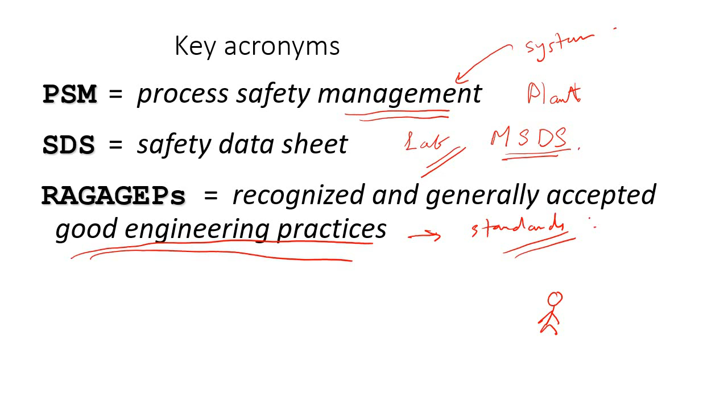So it could be at the level of a person, talking about that person who's sitting in an industry with columns and heat exchangers and so on. What about this guy? Is it safe for him to operate here? Well, it's good for him to have a helmet, good to have an overcoat, so if there is some kind of fire, there's also something to protect him from gases. Is the gas concentration in this area good enough, or does he need to wear a mask on his face? This looks like a beard more than a mask for me.

Okay, and he also needs to wear gloves. What about safety shoes? Maybe he needs to wear some kind of safety shoes. Why? Because safety shoes with steel toes, I didn't see that before. So maybe he needs to wear some safety shoes, because he's going to be working really hard, and maybe he hits one of the pipes that is everywhere, here and there, and he's going to break his finger, right?

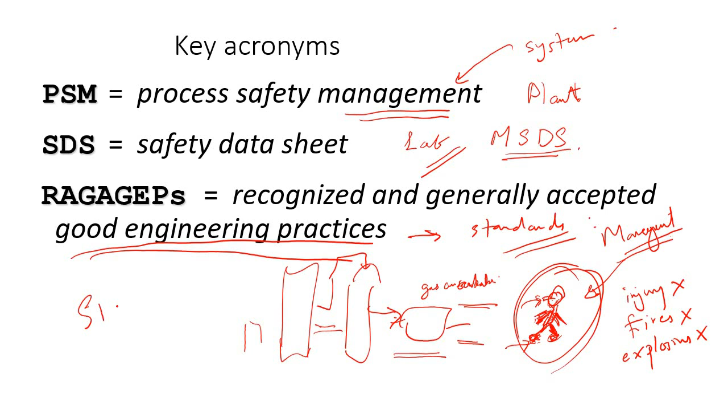So talking about the safety guy, that person working within the industry, there are many things we should take care of regarding his safety, what he's going to get inside his nose, breathing, inhaling, and what could hit him. We don't want any injury, no please. We don't want any fires, yes, no fires. Let me correct that - we don't want any fires, we don't want any explosions, and so on. So the things we need to be careful about are making things safe for that person. And talking about all of this from a management point of view, we are talking about process safety management, and talking about good practices and so on. Of course, we are also talking about standards for good practices, and we are going to cover that.

Okay, so just to trigger our mind, we already triggered our mind with some safety concepts or terminologies. Looking at the chapters, there are more chapters actually within that book. There's also Chapter 12 and 13. I didn't mention them because we are not going to take them, sorry for that. But there are also two other chapters that we are not going to be covering.

Relief sizing, and we are not going to be covering toxic release and dispersion models, because of the limitation of time. So what we're going to take today, we're going to take an introduction for safety and what it means and where it happens, and if there are some incidents that happened before that we want to consider, and then we're going to talk about toxic materials and what is toxic.

Could it be toxic to your skin? Could it be toxic to your eyes? It could be toxic by inhaling, digesting, or ingestion and all that.

What about industrial hygiene? How can you maintain that you're having everything built in so that there's no problem with safety? So if you're talking about the design itself, or you're talking about laws and standards that maintain everything in industries to have hygiene from any losses.

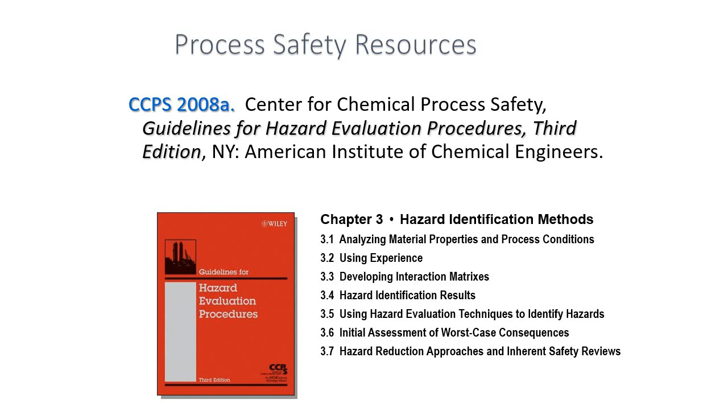So there are references that if you want to read more about hazards identification methods, you can go to this book by Wiley. And there's also another reference talking about the incidents that define process safety by John Atherton and Frederic Gil. So these are the other two references. But our main textbook is by Crowl and Louvar, I think it's the best textbook I have ever seen in chemical process safety.

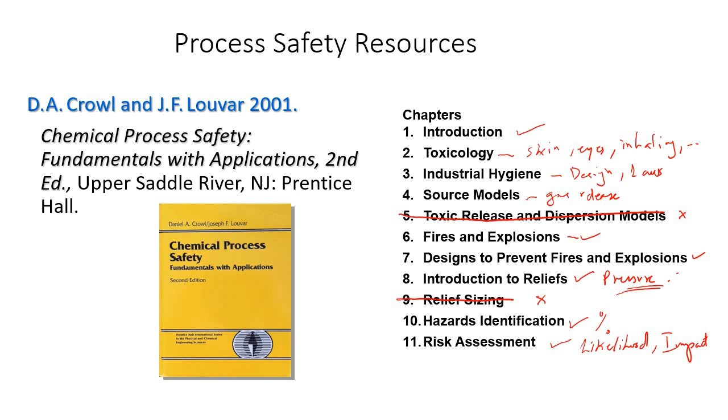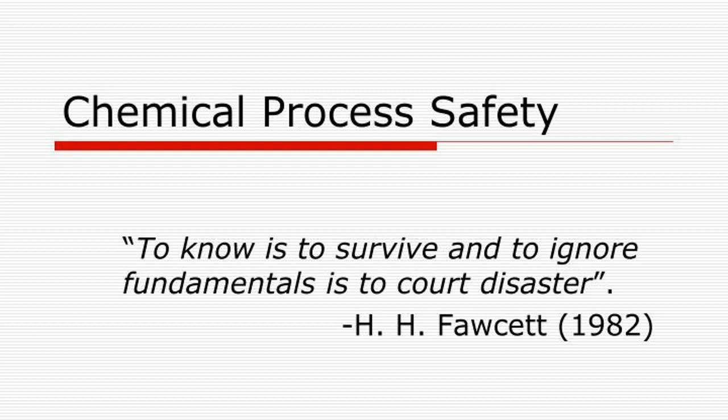Okay, so chemical process safety, one of the popular scholars, Fawcett, said that to know it is to survive, to ignore fundamentals is to court disaster. What he wants to say here is that we should consider fundamentals to maintain that we don't have disasters.

So definitions, just to get some definitions. So when we talk about safety, we just want to say that we do not want to have any loss, or we want to prevent loss. Okay, loss could be in certain aspects. It could be in the property, that means something happened within the building, or something happened within that instrument.

It could be the property, or it could be the people. The people got hurt, which is injury, or you're talking about the people who, hopefully not, died, which is fatality, and it could be the environment. So we don't want anything to happen within these three items. So that is safety. We want to eliminate that from happening, okay, we want to eliminate it.

The hazard is anything that causes this kind of loss, a chemical or physical condition that has the potential to cause damage. So the word damage here, anything that causes damage and loss is a hazard.

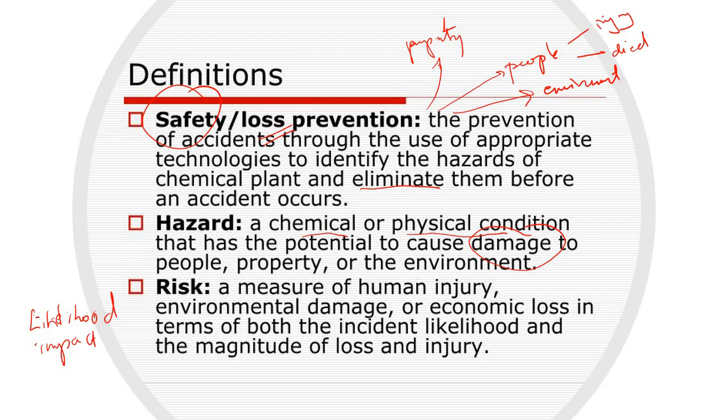And risk, that means, okay, now this hazard which is going to cause the loss, is it high risk or low risk? Well, it is high risk if it happens every time, okay, which is again the likelihood. And it depends on the impact, if it is a high impact or a low impact, which is the magnitude of loss and injury. So if you multiply these with each other, if it is likelihood to happen, that means it happens very frequently, like 12 times per year, and when it happens it has a high impact, that is a very, very high risk.

Okay, so a great guy said, well, why don't we write new terms, beautiful terms for safety? It just reminds us of the details of what we are going to be talking about, or what are the concepts or items of safety. So S for system, A for attitude, F for fundamentals, E for experience, T for time, Y for you.

What they want to mention here is that you cannot have a safety program without a system. You cannot have a system, that means a management for the safety program, for entry, for the way how you put on clothing, for the instruments you're going to use, for the electrical supplies, and what kind of wires.

And where the car should drive, and so on - all management of the safety part. The second thing is the attitude. That means everyone is responsible. Everyone.

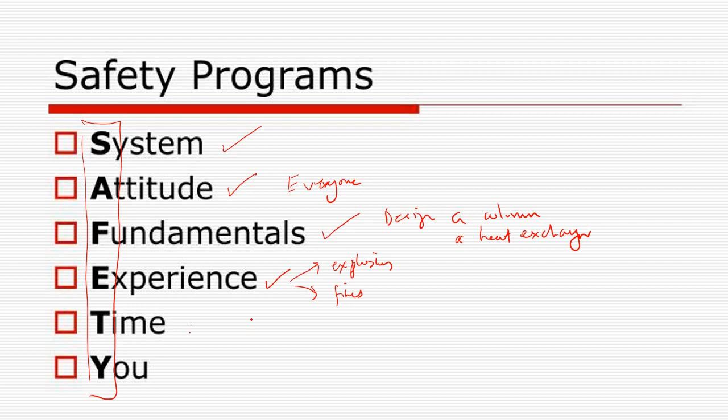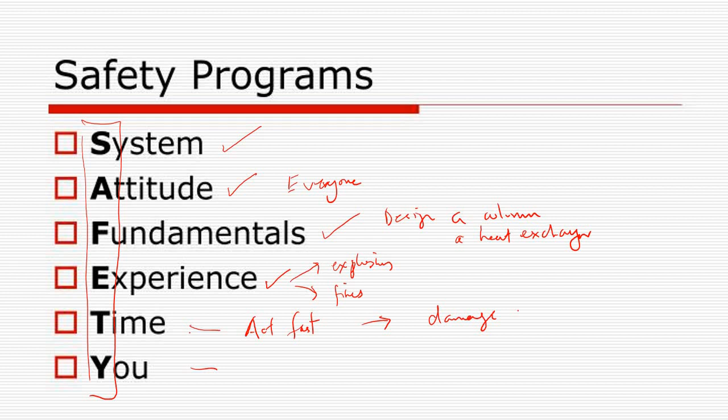And talking about time, we need to act fast, because if we act very slowly, easily we could have some kind of damage to a property or to a person. And of course, us and you and me, we are responsible to maintain that safety. So all of us together, we maintain that safety.

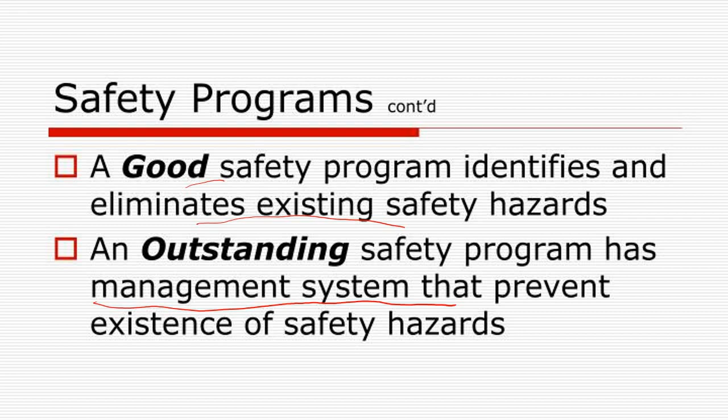So if I would say what is a good safety and what is an outstanding safety program - a good safety program will eliminate any hazard. But an outstanding safety program is to have a management system, to manage this safety program, to manage that safety. So the outstanding safety is definitely better than a good safety.

Other things in our introduction is that we should also consider ethics. And considering ethics, there are a lot of things we could talk about. AIChE, which is the American Institute of Chemical Engineers, has set some kind of fundamental principles. We cannot go through all of them, and we don't actually need to.

But just to mention quick stuff here, for example, being honest - being honest is really important because you need to be honest and impartial. We had examples of some people who had a problem of not following procedures, and they caused some kind of fires and explosions, and then they say, I don't know what happened. They just say, oh, I don't know what happened. And they caused more injuries, and more damage to themselves and to the others. So no, you shouldn't be like that.

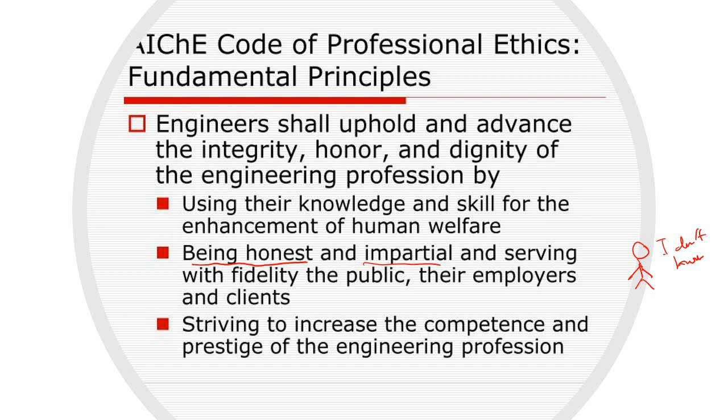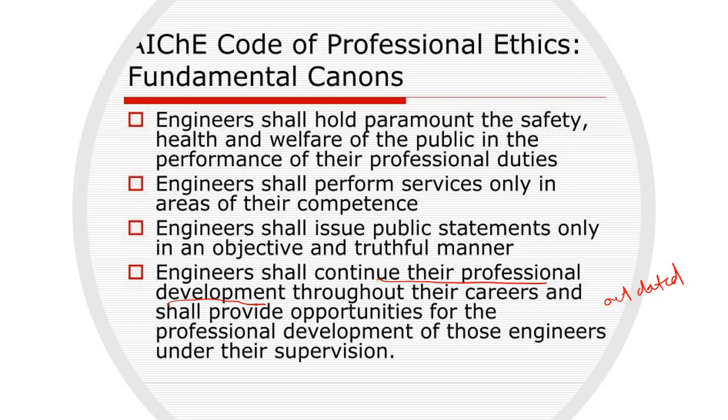You should be honest. And of course, you should increase your competence because things are always changing with time. Another example is that you need to continue your professional development, because you will be outdated with professional standards or safety standards if you don't do that. So these are the many things that come to mind when we talk about code of ethics.

What accidents do happen in chemical plants? Well, accidents do happen in chemical plants, we know that. But you can see that they fall somehow between three main types of accidents: fires, explosions, and vapor cloud explosions. These are the types of chemical plant accidents that are very popular.

And if you look at the details, fires is a type of accident, and here we want to talk about probability of occurrence. How high is that probability? It is high probability. An explosion is less, and toxic release is even less than them. So fires could happen more frequently than others.

How about fatality? Well, fire does not have that kind of fatality, but oh my god, explosions definitely have fatality, but it will be limited to the surroundings to some extent. But the one that has no limits to the surroundings, and even goes further and further, is the toxic release. So we can see that the occurrence is very minimal, but it has a very high fatality.

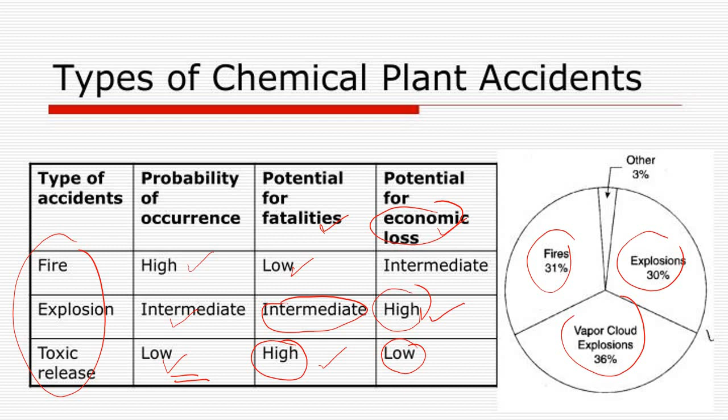I know for a moment you think that we should memorize that. Don't worry about memorization, because all our exams are going to be open book, so you're going to have everything within hand. So don't worry about memorizing, rather you need to understand what is going on.

Okay, so let's go to some statistics. Talking about statistics, what is the main reason for having any kind of accident, error, or problem within your system, or things that are not operating well? Mechanical is the most common reason that causes accidents here.

This is by percentage, by the way - this is 44%. And operator error is 22%. So that means if I work on the design of the mechanical part, and if I work on the training for the operators, I could manage to have no problems at all within my system.

Of course there are other reasons - process upsets, natural hazards, design, and so on. But what I'm trying to say is that these two things I mentioned are the main causes of high statistical errors.

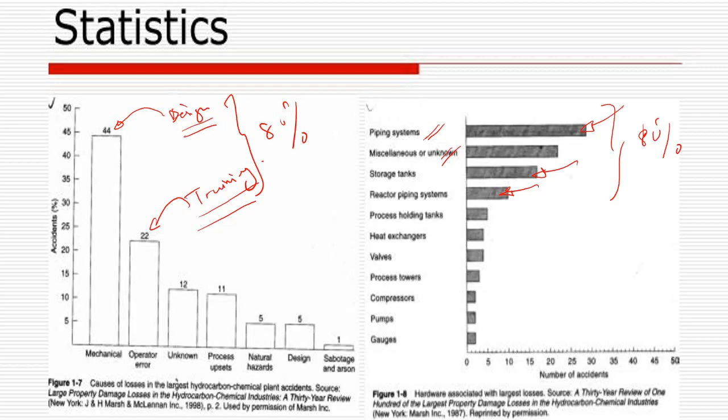Okay, what is an acceptable risk? Well, it's difficult to say because we cannot eliminate risk entirely. It just should happen, and this is life, it's a part of life. We have cars on the way - we should have an accident. It's not that we should have, it just happens that it has to happen.

So what we need to talk about here is how to deal with it and how to minimize it. Okay, so we need to know if the risk is high or not, and of course the layout of the plant and where we have exposures. We could also control how things are going.

Acceptable risk should be calculated, and not based on public perceptions, because public perceptions are always confusing. We should concentrate mainly on what we calculate as a risk. However, we should make the public aware of all the possibilities, because they are part of what we are doing, or part of the whole system, so they should be aware about it. But the thing is, it's not what they say that identifies how risky or less risky it is.

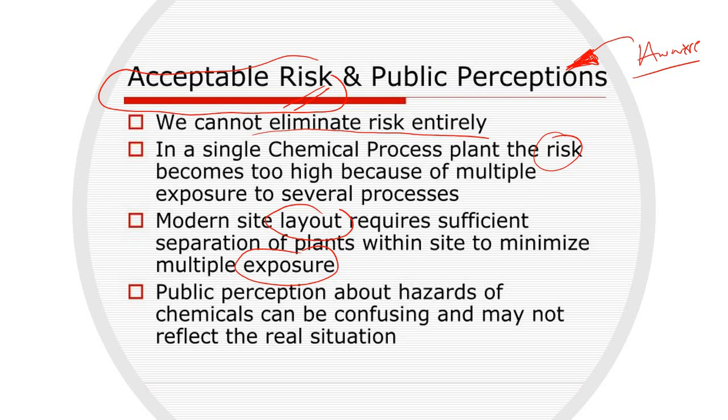Okay, so now just some calculations which help us get the idea of the risk. There are three methods to report accidents: the OSHA incident rate, the fatal accident rate, and the fatality rate, or the deaths per person per year.

So the higher the fatality rate, that means more people are dying per year. The fatal accident rate means it's more possible that accidents will happen that could cause someone to die or get injured. Fatality is a little different than fatal, even though sometimes they're related to death or to injuries. And the OSHA incident rate is how many incidents occur.

And of course, I did not mention OSHA, which is the Occupational Safety and Health Administration. So that is an occupational safety, health association. It's also related to safety and health, and it's a very popular association.

Okay, so all three methods report the number of accidents or fatalities. Accidents is the incident rate, or fatalities, for a fixed number of workers. So they need to fix that number. Why do they fix the number of workers?

So that they can compare from one country to another. If I say I have 100 incidents per year, and someone else says 1,000, it could be that the person who said 1,000 is in China talking about a very big company. I'm not sure, and I just have a small company, which is why I have less numbers. But when I base it on a certain number of workers, per 10,000 workers, and say how many of the 10,000 workers per year have an incident, then we can compare. This is why we try to fix the number of workers.

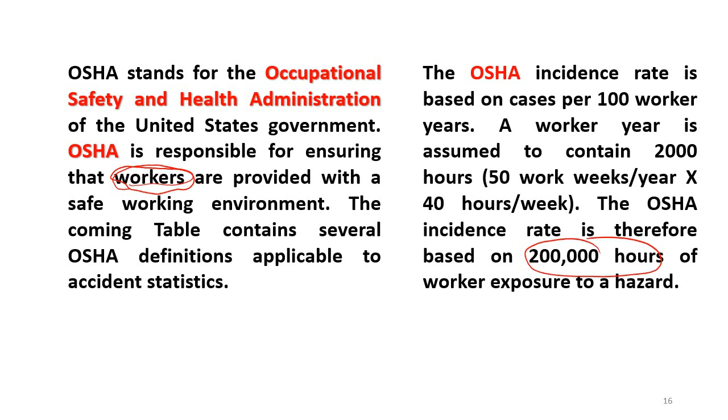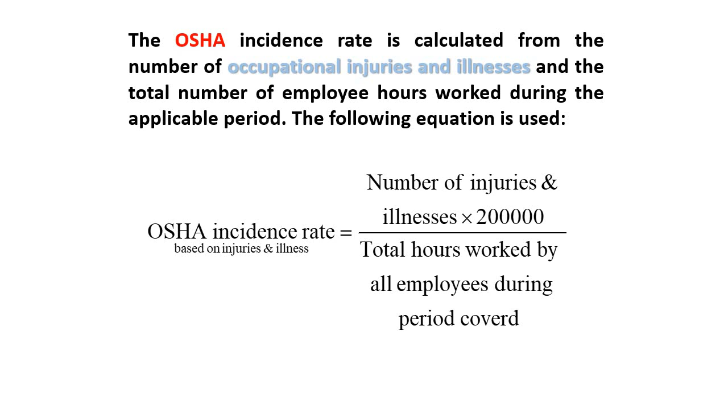This is why we say 200,000 hours of worker exposure to hazard. So I multiply 200,000 worker hours of exposure to hazard by the number of injuries that I have, divided by the total hours worked by all employees in that period covered, and that will give me the incident rate that I want. We'll take an example very soon.

Before the example, there are some glossary terms to go through. First aid: we know you need first aid if you have an injury. Incident rate: number of injuries, as we mentioned. Lost work days: that means you're losing some work days because someone is hurt.

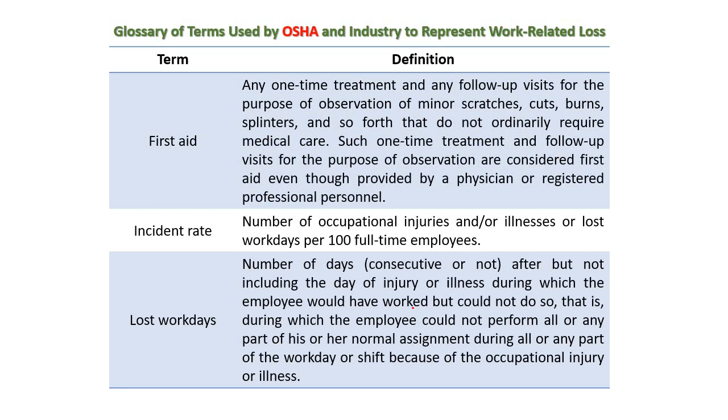There is a detail here, because there's a difference between lost work days and some other terms. Lost work days are counted because someone is injured and just left — the number of days after, but not including, the day of injury, during which the employee would have worked but could not.

Medical treatment: you're dealing with treatment through a doctor, physician, or registered professional personnel. Occupational injury: an injury such as a sprain, cut, or burn that results from work — it happened there at that work, an instantaneous exposure that happens in the work environment.

Occupational illness: that means there's an illness, like someone getting a dizzy head because of something he smelled, resulting from occupational exposure. It happened through his occupation and exposure to environmental factors — for example, a certain percentage of a gas within the atmosphere that caused illness or disease.

Inhalation: he has a problem with breathing, and a problem with how his stomach is reacting to what he had breathed in.

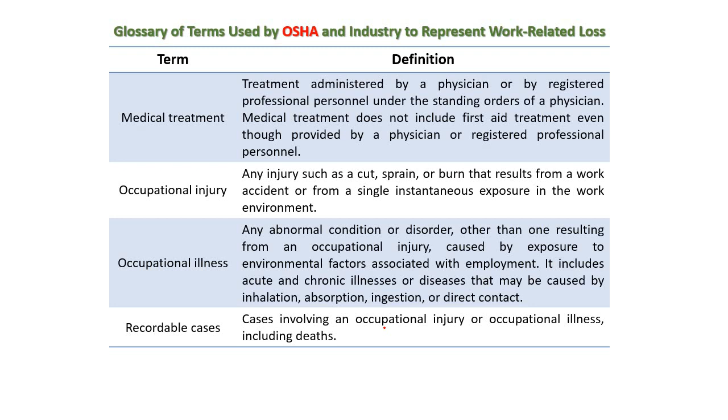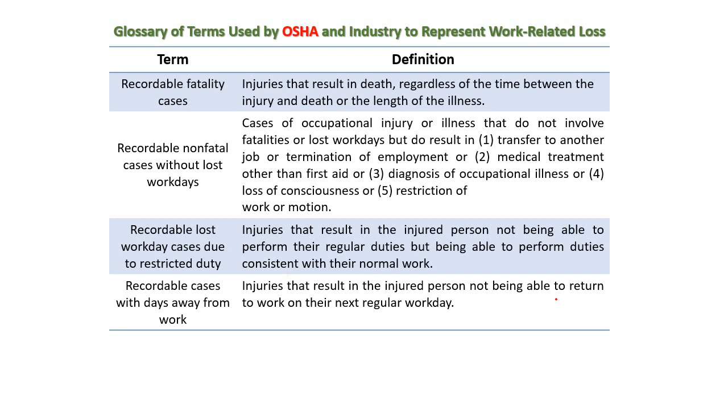Recorded cases are cases that are recorded — how many injuries, how many deaths, and so on. Fatality cases: how many people are dying. Non-fatality cases: people who don't die but there are lost work days, or recordable lost work days due to restricted duty because of the injury. And there are cases with days away from work, meaning not being able to return to work on the next regular work day. These are all just terms, along with medical cases.

So going back to recall, after covering the details of the definitions: an incident rate is based on lost work days instead of injuries and illness, for this case. So it's the number of lost work days times 200,000 work hours, divided by the total hours worked by all employees.

I think so, you can just read that, it's all about the definition. Okay, what about the FAR?

The FAR, F-A-R, the fatality rate. Talking about the fatality rate, it is used by the British chemical industry, and this fatality rate is a report of the number of fatalities based on 1,000 employees working their entire lifetime.

And what is the entire lifetime? That means they're assuming to work a total of 50 years. Thus, the FAR is based on 10 to the power 8 working hours. The resulting equation is that.

The resulting equation is the number of fatalities multiplied by 10 to the power 8. That means we are considering that they are working for 50 years, 1,000 employees, and that is the number we multiply with, divided by the total hours worked by all employees during the period covered.

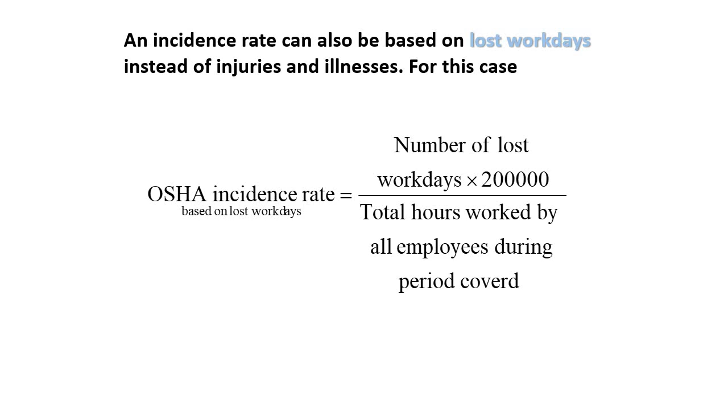So FAR depends on the exposed hours, and even the OSHA incident rate. If you go back, the OSHA incident rate has the 200,000 hours, and the FAR is multiplied by 10 to the power 8, considering the working hours that we have, and we have that 1,000 employees. And then the fatality rate does not depend on the exposure.

Well, the number of exposed hours is poorly defined, if you can see. It just calculates how many fatalities we have per year over the total number of people. And here we just mentioned that the ones who consider the number of exposed hours are the OSHA incident rate and the FAR.

So going to the example: a process has a reported FAR of 2. If an employee works a standard 8-hour shift, 300 days per year, so 8 hours multiplied by 300 days per year, compute the deaths per person per year.

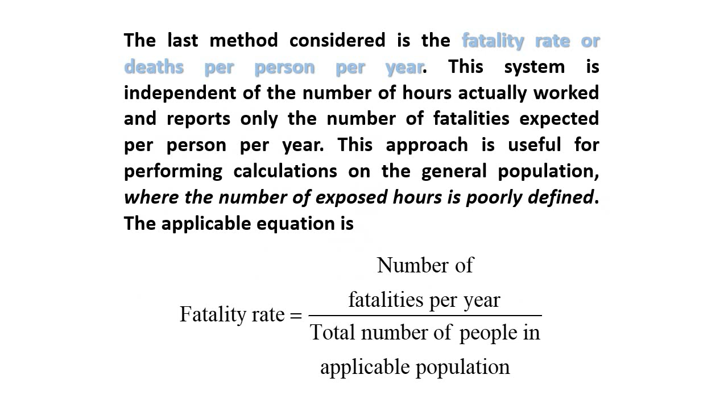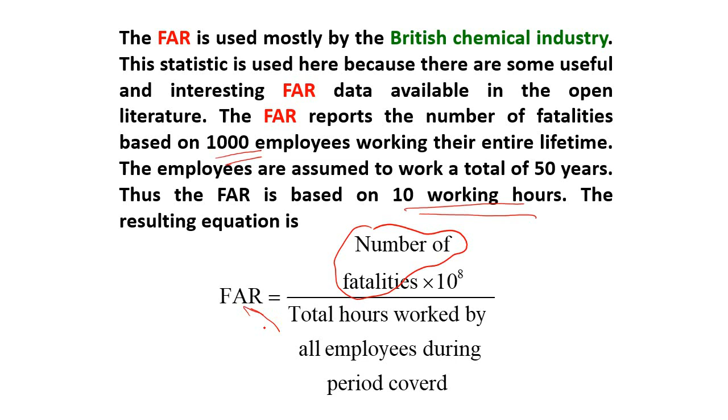Okay, sorry. So we know what you're going to do. Talking about the equation, so we have the equation: if you just look at it, FAR is equal to number of fatalities into 10 to the power 8 over total hours. So if you want to calculate the number of fatalities, we need to multiply FAR with the total hours worked.

So what is the FAR? The FAR is 2. Multiply by the total hours worked. Total hours worked is 8 hours per day into 300 days per year, and this is divided by 10 to the power 8. So we got 4.8 times 10 to the power minus 5.

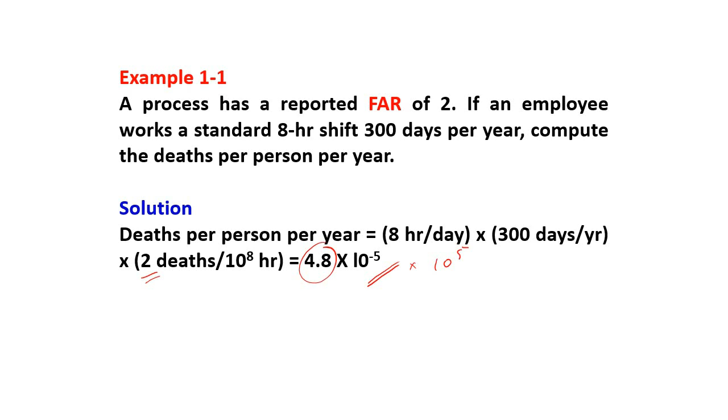I know you say the number of fatalities is very low, it means no one is dying. But if you multiply by 10 to the power 5 hours, for example, you're going to know that based on 10 to the power 5 hours, which is 100,000 hours, there's not just one person but about 5 persons going to die every 10 to the power 5 hours. And you can compare now from one place to another if this is acceptable or not.

I was just going to say that it's not acceptable for any person to die, but it only happens, it's like accidents. In car accidents, people die. From accidents, we just need to live with that kind of technology of what we are doing, and sometimes it causes some side effects that are out of our control.

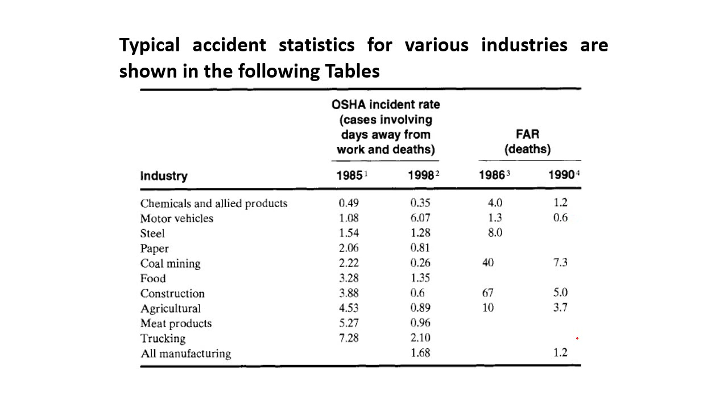What about agriculture or construction? In construction, people died just from falling off several stories, and the reason is that there wasn't a lot of management there for safety. Look at the number now, it's just 5. Agriculture went from 10 to 3.7. So you can see that standards and management of standards can make things different.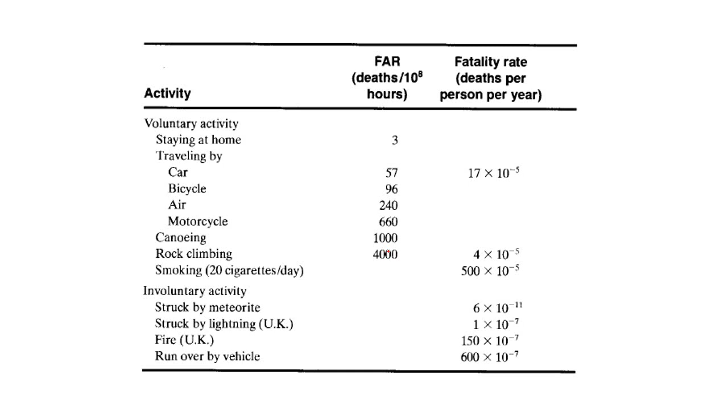Talking about bicycles, they're higher than cars, even though we know no one is going to die from a bicycle alone, but hitting a car could make him die. You can see even airplanes - we know there's no data here, but it could actually be safer sometimes to go by air rather than car. Rock climbing is high too - if you fix number of hours and number of people, it's very high to have this incident, the fatality rate, and so on.

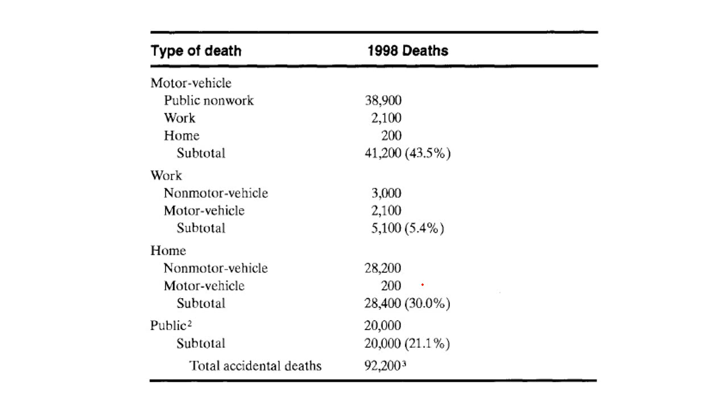And again, the number of deaths that happen for motor vehicles, number of deaths that happen for work, for non-motor vehicles, motor vehicle deaths from homes, and so on. So this just gives you the details of what the number of deaths are.

So, acceptable risk. Talking about transportation incidents on a highway, of course we're going to have many incidents. Let me read that: the manner in which workplace fatalities occurred in 1998. So what happened in workplace fatalities? Based on the total number of fatalities, which is 6,000, this is what happened that year.

We had fires and explosions - these are the number of people who died. These are the number of people who died due to harmful substances. These are the number of people who died due to falling. These are the number of people who died due to contact with equipment. These are the number of people who died based on violent acts, and these are the number who died because of cars and vehicles. I can't see how big that is, but you can see highway struck-by-vehicle, non-highway aircraft, or within-highway incidents are the highest - you can see the big number there.

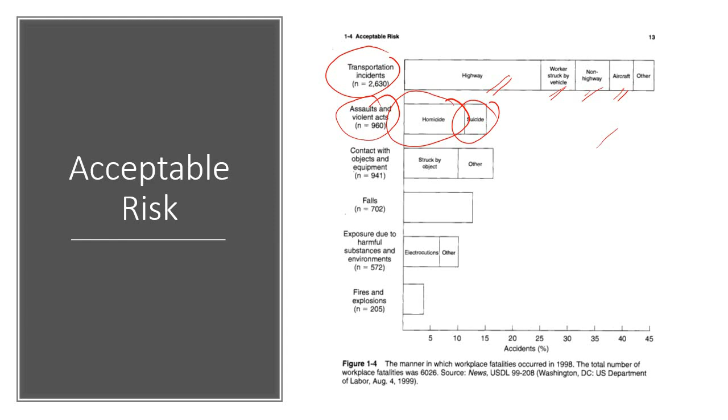It's just said, acceptable risk - is this acceptable? It is acceptable that it's happening, but we can also do something about it. For example, homicide and suicide rates are very low in some countries, very high in others. So definitely there is something we can work on to fix it.

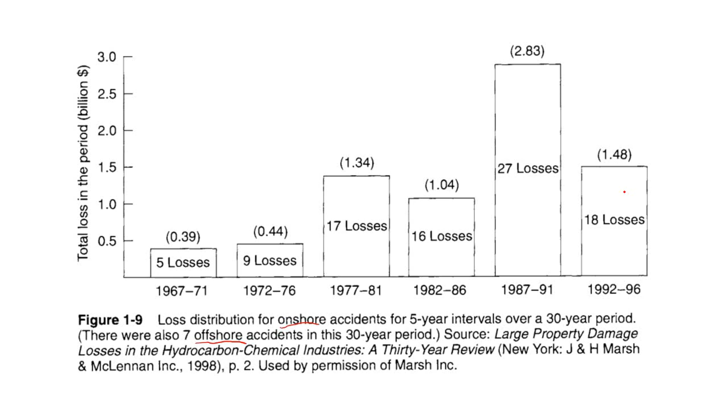So talking about loss distribution - the loss distribution for onshore accidents over 5-year intervals, over a 30-year period. There were also 7 offshore accidents in this 30-year period, so we're talking about onshore and offshore accidents in your country and other countries. From 1967 to '71 we had 5 losses, then in the next period 9 losses, then 17, then 16, 27, and the last one 18 losses.

So we are trying to control things and keep losses lower, even though our technology is going up and the number of industries is really growing - but that is why you had high losses.

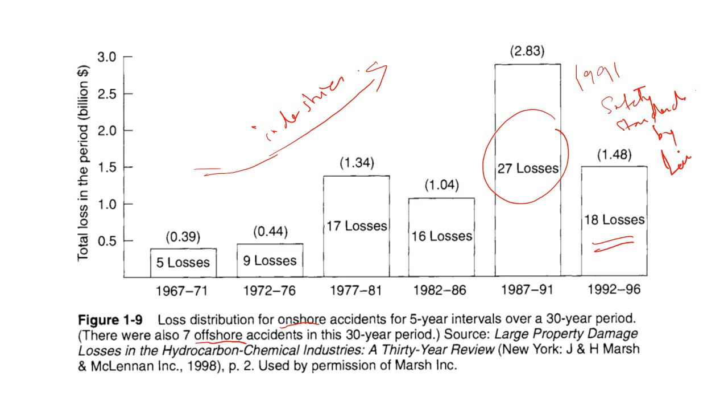In 1991 and 1990, we had a lot of safety standards coming on, and everyone started obeying them by law, and this is why things have changed within this year.

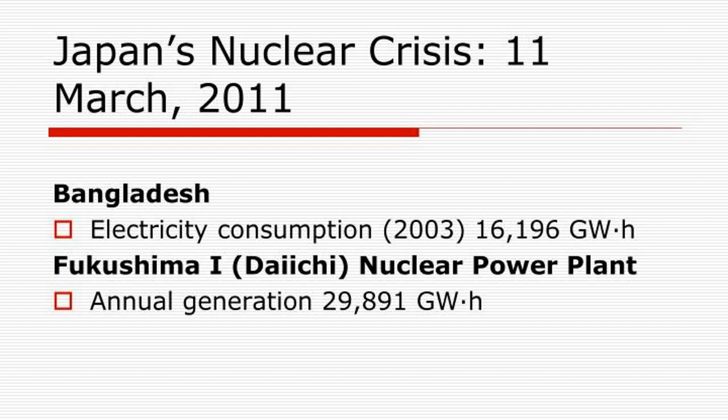Now talking about the crisis. There are many crises that happen in our life. Japan nuclear crisis is one of them, and if you go through it, there are many things that happened. Bangladesh, for example, had a big problem with electrical consumption.

What was the reason? There was an earthquake in Japan, and due to that earthquake, the nuclear plant could not manage. We could not manage to control it because of the cooling system we were trying to have for the control rods. Because of that earthquake, things were out of control, and the pressure got higher and higher, and then it exploded.

Actually, it was also not at the required depth, and because it was not the required depth, we learned from experience. It was very close to the ground, to the surface, and that also caused more severe problems.

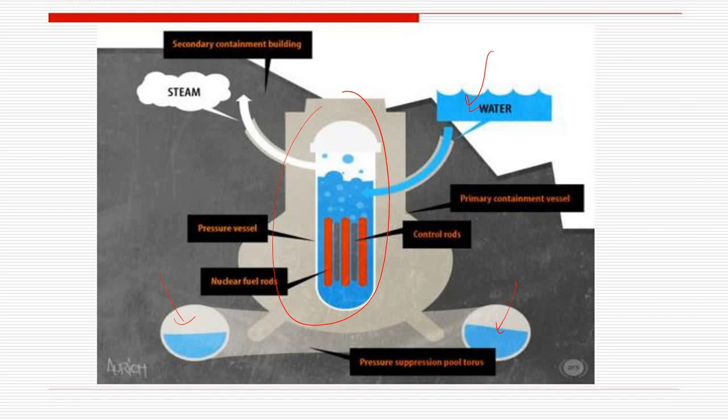The earthquake happened, as we mentioned, and the emergency generators that worked to run the cooling system did work, but then shut down after an hour. When the cooling failed, the water started boiling, the steam pressure went up, and things were out of control.

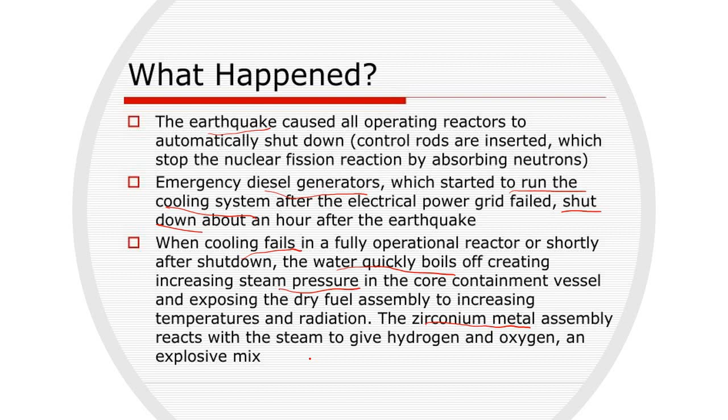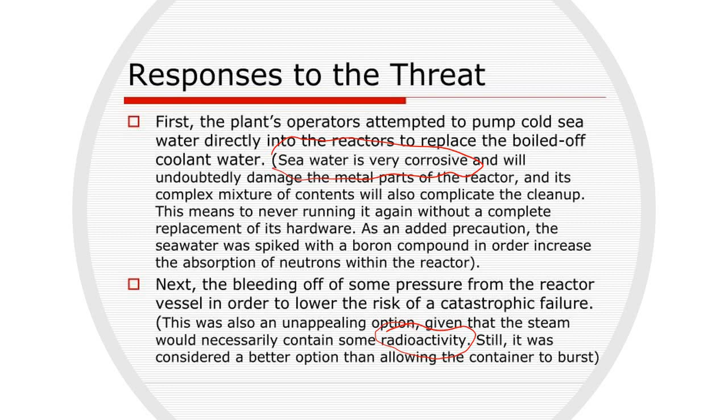Then we had zirconium metal with the steam. That was an explosive mix, and that was a big problem. There was a big threat all over. Many people died, and a lot of things happened. But one of the worst things that could happen was the radioactivity. Seawater is very corrosive, so it also made the plant go out of function.

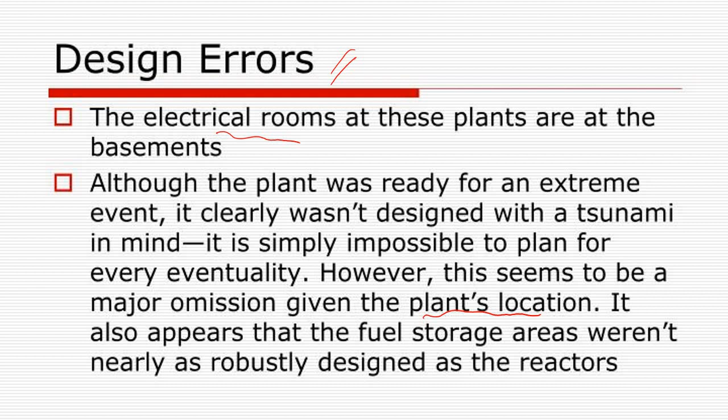Talking about the errors here, we had some design errors. The electrical rooms were sitting at the basement, so there was no access to them, so we couldn't even control things. They were out of our hands. That was like a design problem. There are also things about the plant location and how deep the plant was going to be.

Human nature means we don't have everything really back in hand, so less immediate backup systems tend to be not well designed or maintained compared to the primary backups. One example is the temporary holding ponds. The temporary storage pool to which the fuel had been transferred during maintenance is much smaller and near the top of the reactor, unlike the 15-meter deep permanent storage pools. That was one of the big reasons.

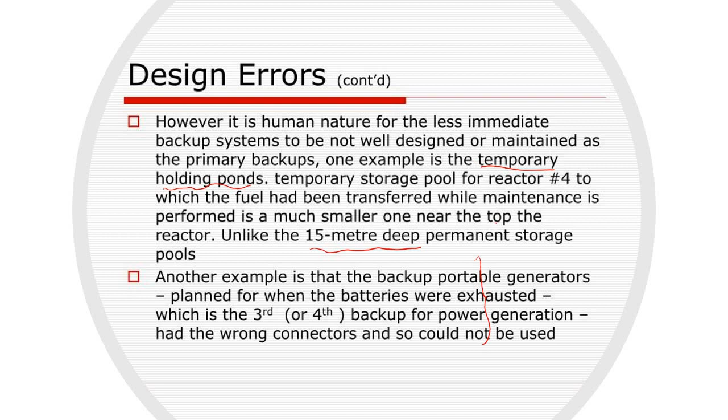The generators did not work for some time, so the batteries were weak and exhausted, and we did not have a backup for that.

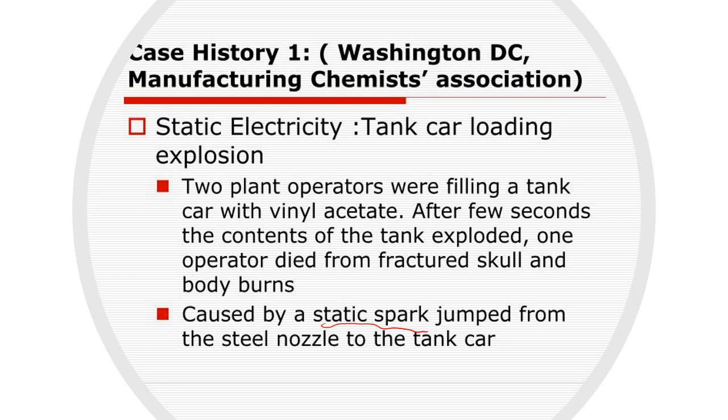Another example: two plant operators, from a case history of the Manufacturing Chemists Association in Washington, D.C., were filling a tank with vinyl acetate, and after a few seconds, the contents of the tank exploded. One operator died from a fractured skull and body burns caused by a static spark that jumped from the steel nozzle to the tank car. This should not happen again; we should have proper design and procedures to prevent it.

Chemical reactivity: a chemist twisted the cap of a bottle of isopropyl ether, the cap broke, and it exploded. The man died, caused by rapid decomposition, due to internal bleeding causing hemorrhage. So we should be careful.

Another case from the chemist association, more related to chemistry than design. We already talked about the design part, now we're talking about the chemistry part.

System design: an ethylene oxide explosion. A process storage tank containing 6,500 gallons of ethylene oxide was accidentally contaminated with ammonia. The tank ruptured and dispersed ethylene oxide into the air. This vapor cloud exploded. One person was killed and 9 injured, with property losses of 16.5 million.

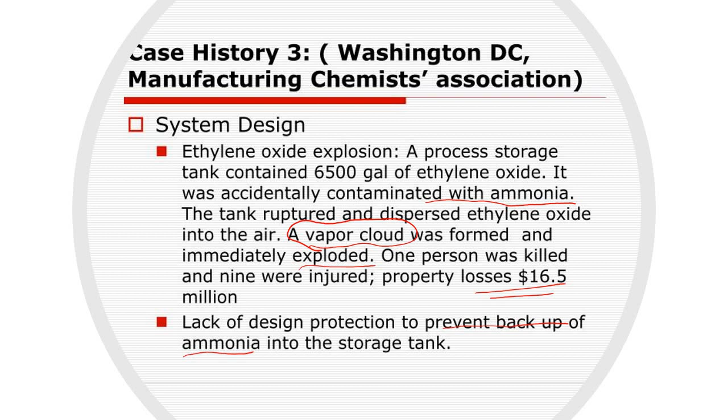There was a lack of design protection to prevent backup of ammonia. There should be a backup system so the ammonia doesn't contaminate the ethylene oxide and cause that vapor cloud explosion.

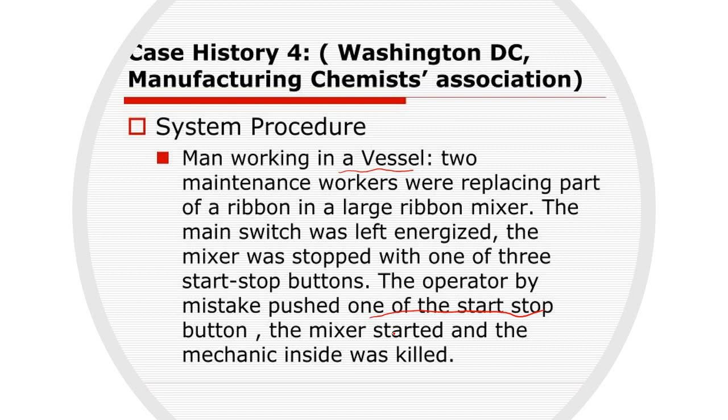A man working in a vessel - this is very painful. Two maintenance workers were working together, and the main switch was left energized while the mixer was stopped. The operator by mistake pushed one of the start-stop buttons, and the other mechanic was killed.

Bigger disasters, like the one that happened in Bhopal, India, you can look up on YouTube - there are a lot of details about what happened.

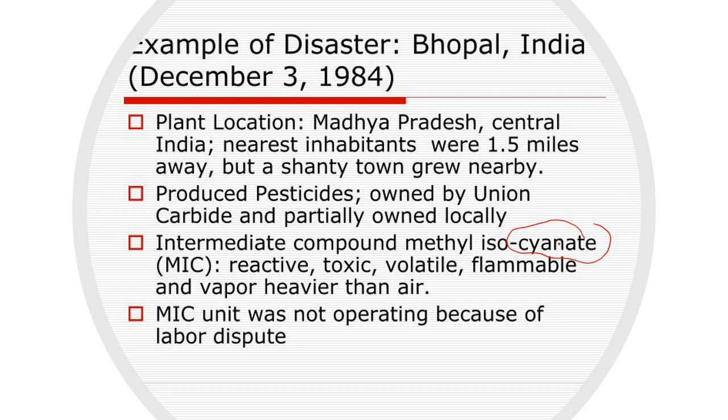It was a really serious disaster that happened in 1984. The thing to specify here is the storage tank containing a large amount of MIC, which is methyl isocyanate, and cyanate is really very, very poisonous. The amount became contaminated by water and heated by reaction.

Why was it heated by reaction, and why did the relief valve not do its job? There are a lot of details there, with backup pressure and so on. We will not go through that detail, but 25 tons of toxic MIC vapor were released. How many people died? Over 2,000 people died. This is other than people who were injured, and other than the animals and plants that also died. So, alternative reaction scheme or redesigning of the process with reduced inventory is something we should work on.

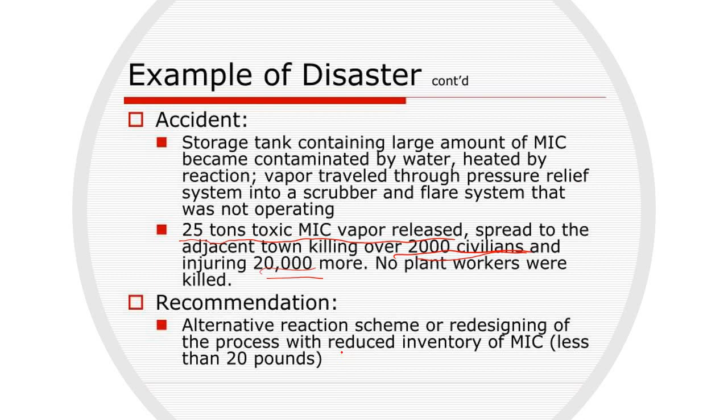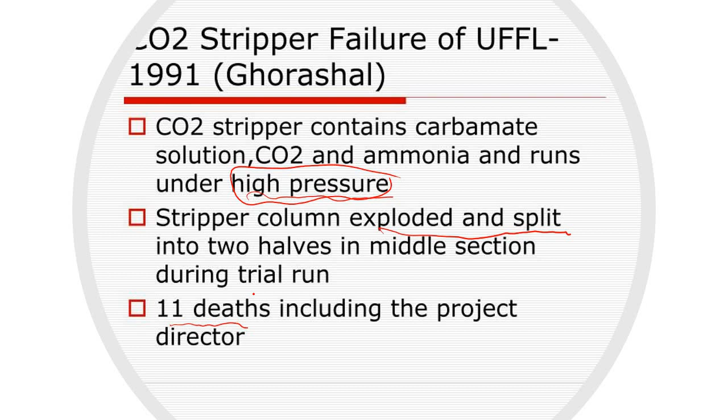So CO2 stripper is another thing that happened in Ghorashal in 1991, and 11 people died. Why? Because the stripper column exploded and split into two halves. The CO2 stripper contains carbamate solution and ammonia and runs at a high pressure. The high pressure went out of control, it exploded and split into two halves, and 11 people died.

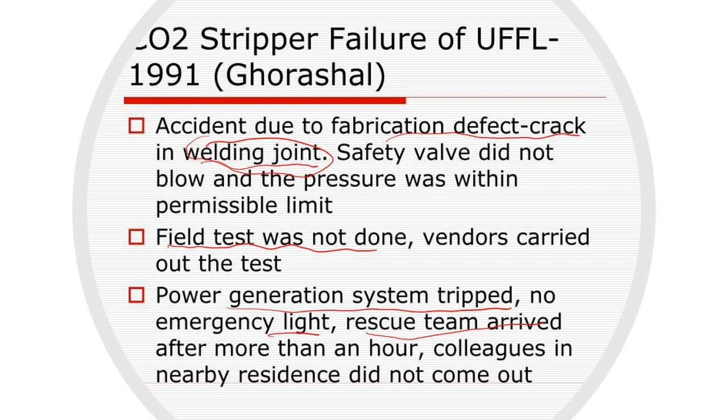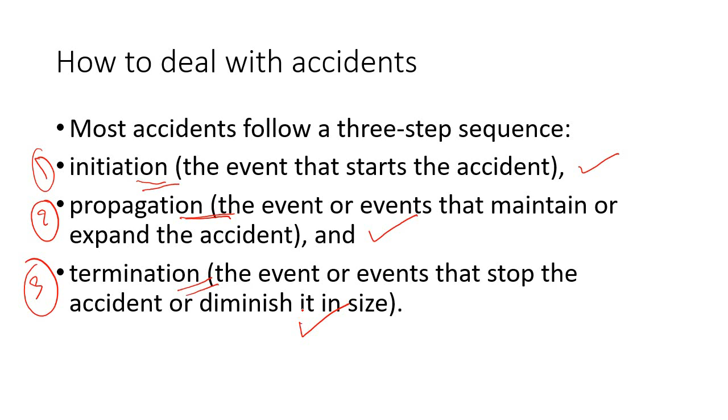How do we deal with accidents? To deal with any accident, we need initiation, propagation, and termination. That means what initiated this accident, what made it propagate, and what could terminate it. If we prevent the initiation part, we are good. If we couldn't prevent initiation, we could prevent it from propagating. If we couldn't prevent it from propagating, we should know how to stop it - which could also mean shutting down the plant. So these are the three different stages of an accident process: initiation, propagation, and termination.

What are examples of initiation? Examples would be grounding and bonding, inerting - putting in some inert material - hot work permits, and human factors design. Propagation involves materials transfer, reducing inventory, or the space layout - if everything is compact, it could propagate very fast. If you don't have valves, pressure build-up could propagate very fast. Termination is firefighting - dealing with it directly, opening the relief system, the sprinkler system - just working on shutting off everything and dealing with it extremely.

Here's an example: there was a failure of a threaded 1.5 inch drain connection on a rich oil line at the base of an absorber tower in a large gas producing plant, which allowed the release of rich oil and gas at 850 psi and minus 40 degrees Fahrenheit. The resulting vapor cloud ignited from the ignition system of engine-driven recompressors. The 75-foot high absorber collapsed across the pipe rack and onto two exchanger trains. Breaking pipelines added more fuel to the fire - imagine that.

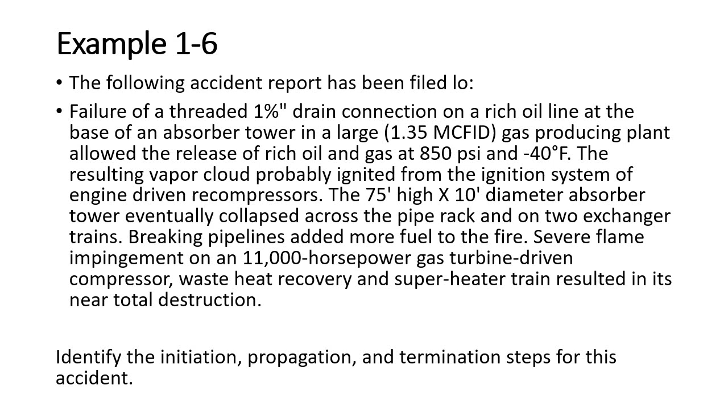Severe flame impingement on an 11,000 horsepower gas turbine-driven compressor and waste heat recovery superheater train resulted in its near total destruction. What is the initiation, propagation, and termination step for this accident?

Initiation - what happened? A failure of the threaded 1.5 inch connection, this is what happened. What made it propagate? Release of rich oil and gas, formation of a vapor cloud, ignition of the vapor cloud by the recompressors - that's what made it propagate. What made it terminate? Everything finished - all the oil and gas that had been released got consumed. Consumption of the combustible materials ended the process. So this is what happened here.

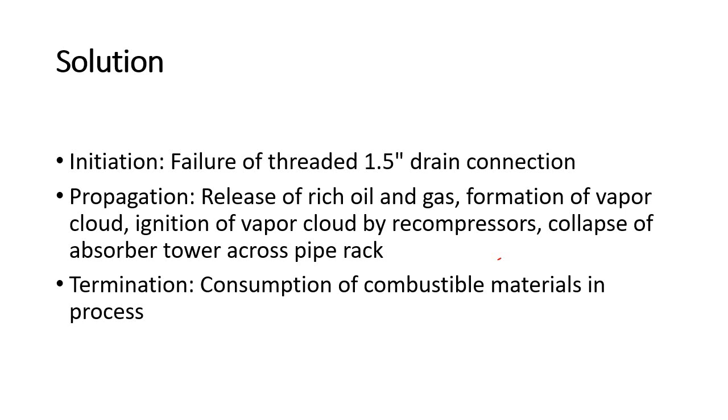How do we deal with it? We can use those technologies to address it. There are other things we should consider, which, with our introductory and very long lecture, is inherent safety.

The inherent safety terminologies are intensification, substitution, attenuation, and limitation. I think these are complicated ways of talking about things, so we will use easier words.

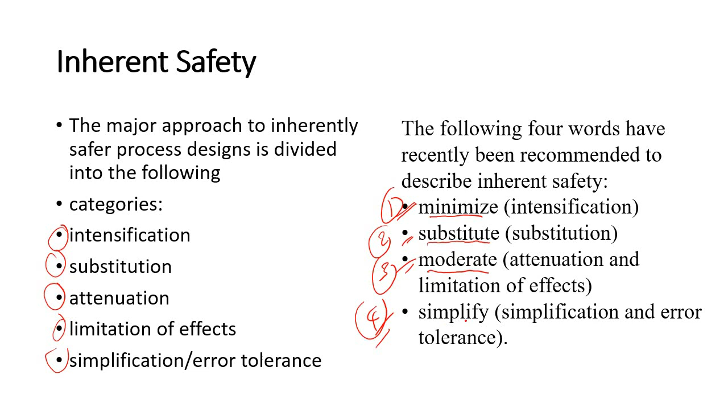Minimize, substitute, moderate, and simplify. If we can minimize our operations, it will be better. We can substitute less toxic material, and if we limit the effects of certain operation levels so we don't have very high pressure in a system, and simplify it, that's always better. These inherent safety techniques are open, so you can always use what's available at hand.

Minimizing: change from a large batch reactor to a smaller continuous reactor. Reduce storage inventory - I don't want high storage inventory because it causes problems, so I just want to reduce that inventory.

Substitute: instead of a mechanical pump, use a different pump. Instead of flanged pipe, use welded. Instead of a highly toxic solvent, use one that's less toxic. Use mechanical gauges rather than mercury gauges, and so on.

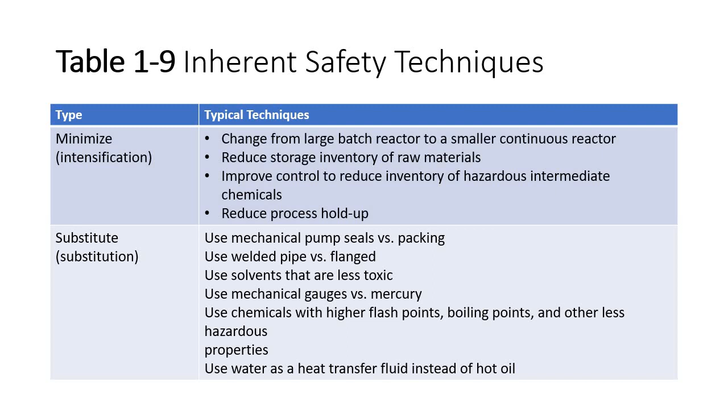So you're substituting. Moderate: I'll use vacuum to reduce boiling point rather than other procedures. I will reduce the process temperature and pressure to work at lower levels rather than high ones.

Refrigerated storage vessels, like the one for ammonia. If you have ammonia in your process, how do you store it? You could store the gas at high pressure, or make it a liquid and store it that way - liquid is much safer and better. So we can have things stored or operated differently to have fewer problems.

Dissolve hazardous material in a safe solvent rather than a hazardous solvent. Operate at conditions where reactor runaway will never happen - if a reactor runs away, the temperature or pressure is just running up uncontrollably. So we need to operate at safe conditions, not only for production.

Place control rooms away from operations, because if it's too close to operations where there's an explosion, the control room will also be destroyed, and no one will be able to control the situation.

To simplify things, keep piping systems neat and clear to read and visualize, because if you need to act directly on the system, you need to be able to see it clearly. Otherwise you don't know what to do - for example, if you don't have lights, that's a big problem.

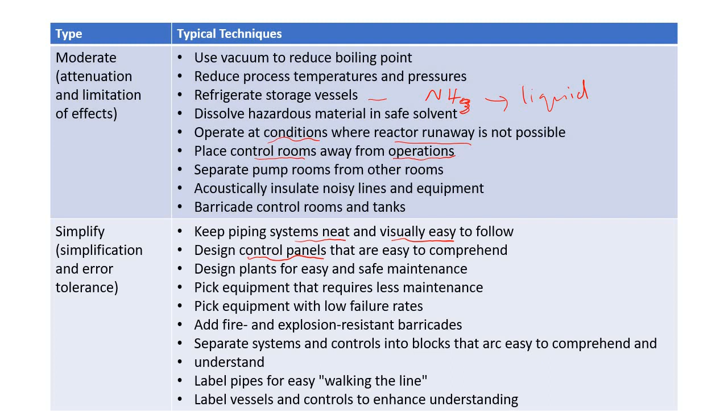Design plants for easy and safe maintenance - we need something we can maintain safely. Pick equipment that requires less maintenance, and equipment with a low failure rate. We're trying to simplify how we use things.

We use barcodes or barricades as well, which helps us. We label the pipes and label the vessels so we know what we're dealing with.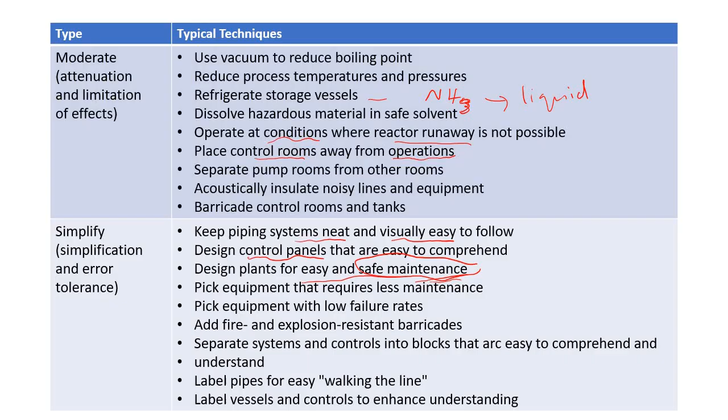That is enough for chapter 1, because we've already covered the hazards part, and the remaining hazards content we'll cover later.

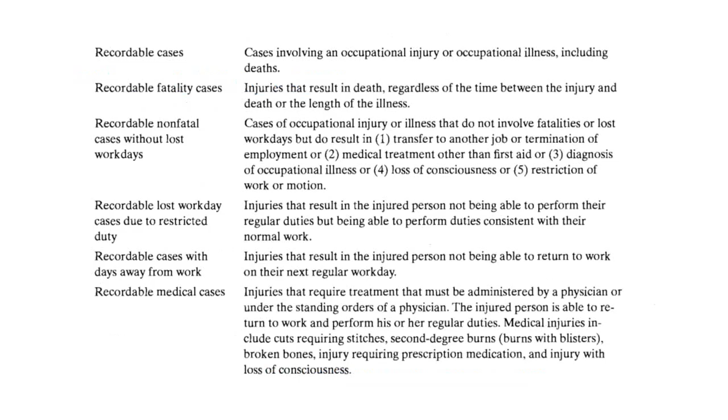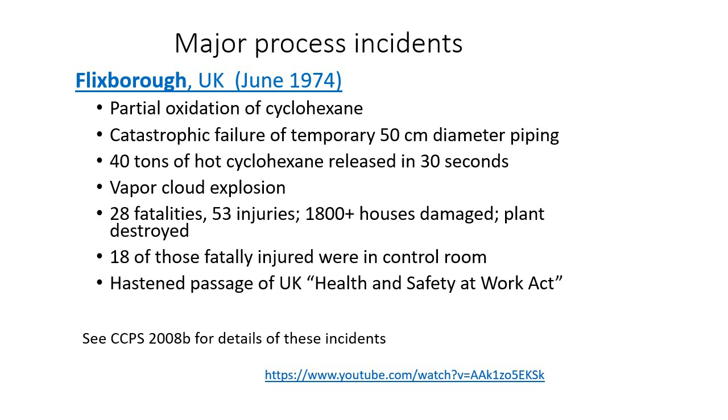There are some process incidents I'd like you to read about - I've kept the link at the bottom. You can see it's a YouTube link, so just click it to go to the file. There are many cases there with pictures of what happened, and you can also read more about the Flixborough incident in the UK.